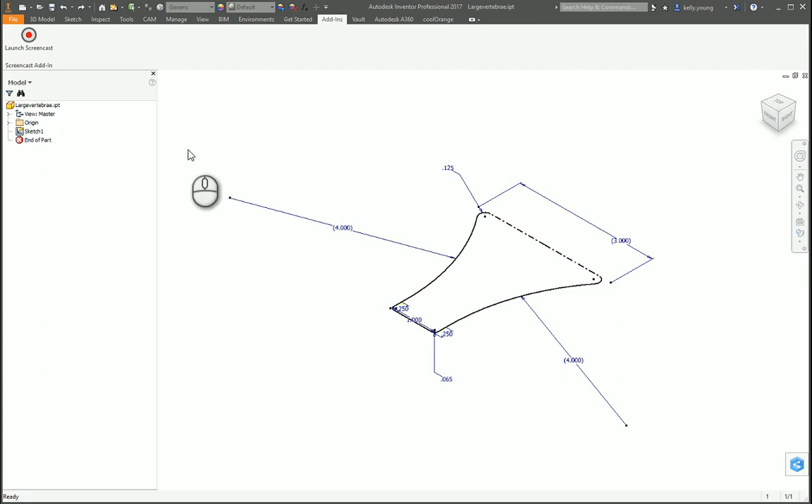Looks like you found it out, but I'll go through this with you a little bit and show you a better way. So you got this part here.

This is the origin, so all the axes come into one spot. If you look at the origin, that's where all the planes converge and all the axes converge into a center point.

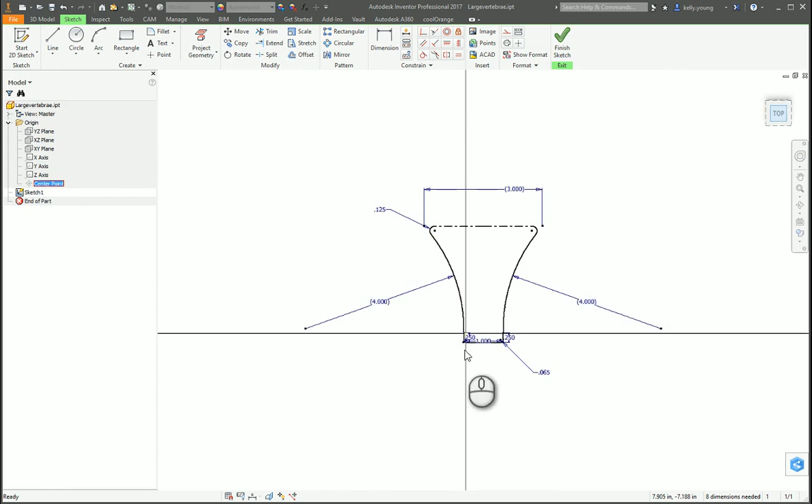So best practice would be to always have the center of your part go through that spot.

Right now, it shows here you have 8 dimensions needed. You could show your degrees of freedom, and it goes all over the place.

So what we're going to do real quick is take this point and put it on the center, and it goes into place. Now there's 6 dimensions needed, so it's still going all over the place. Looks like we still need to control this dimension.

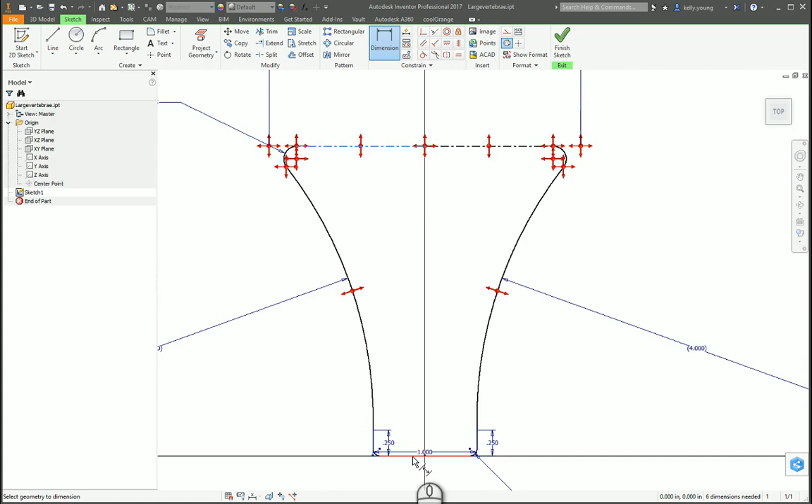Now you put a center line here. A center line is what you actually want the part to revolve around. So think of it like a lathe or pretty much anything that spins. It's got a center axis that spins around it.

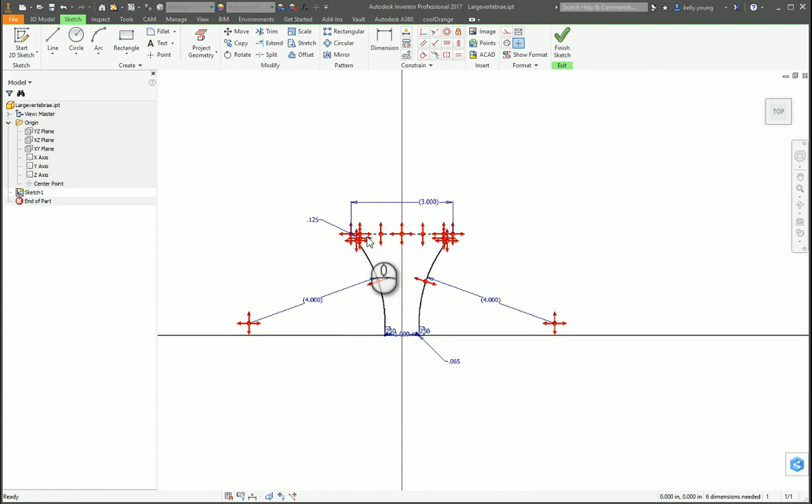So if you want a hole in the middle, you're going to have to revolve around that hole. I don't think that this is your center axis. I don't think you want it to revolve around like this.

I don't think that's what you're looking for, because that's the axis. See how it's dotted?

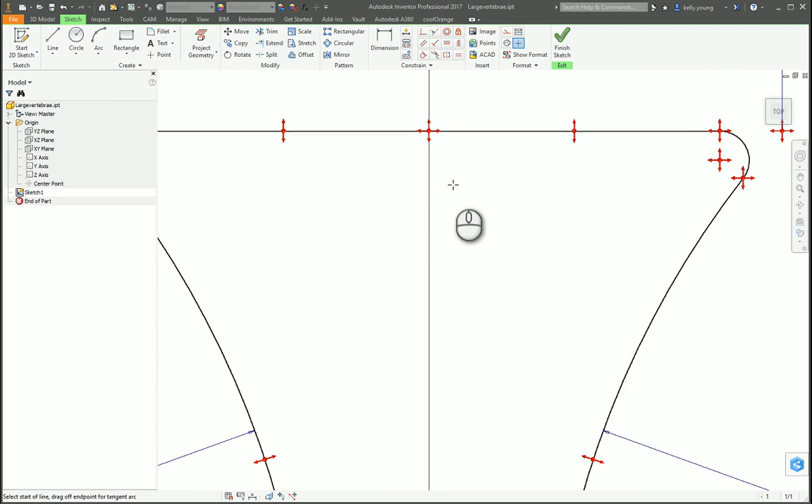It automatically finds that center line. So from the pictures, I think what you want is, instead of making those center, you want to have a line in the middle like this, and then that would be the center line.

So then it would revolve around. Because then you would just say, I want this half around this axis, and that gets you the revolution.

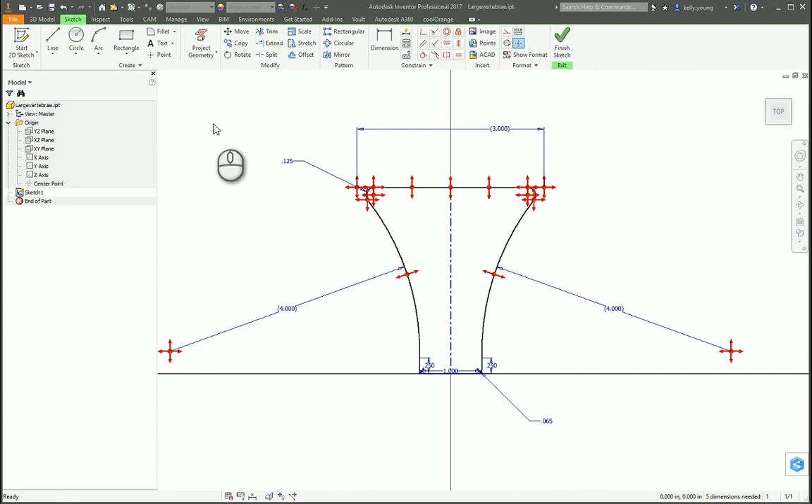Now, furthermore, you're doing double the duty if you know it's going to be a 360-degree revolution. So if we just trim off pretty much everything on this side and get rid of it...

I'll show you why. So pretty much we have half of it, and it's going to revolve all the way around. As long as we have a closed profile going around here, we don't need the other side.

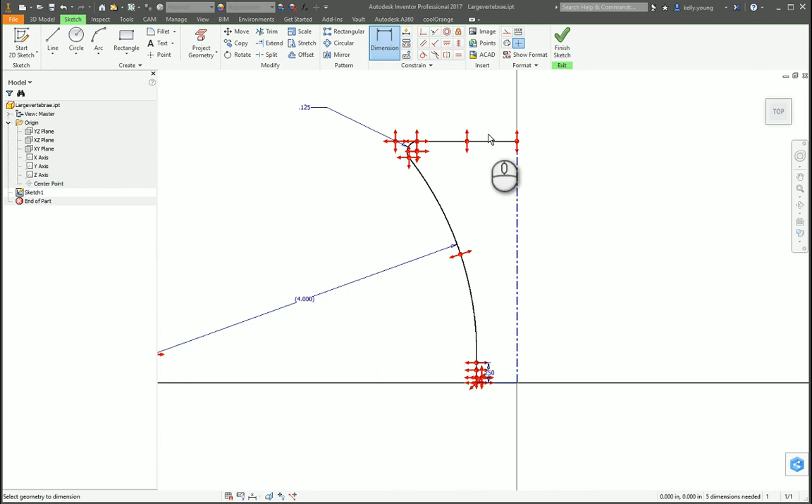So if we dimension here, we're at 3, and looks like we have some degrees of freedom from right here to there. So when we have the center line, it'll pull up a diameter, which gives you that.

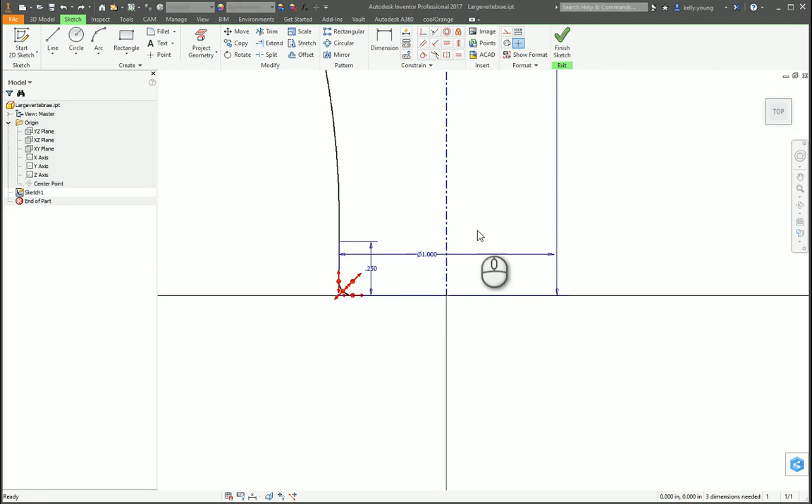If it were not a center line and you dimension from outside to outside, it only gives you a straight linear dimension. Once you have it set to a center line, it will then give you the diameter. So let's go ahead and dimension some of these things again.

It already exists, okay. And if we dimension out to there, that's our overall outside dimension. I don't know if this matters, but...

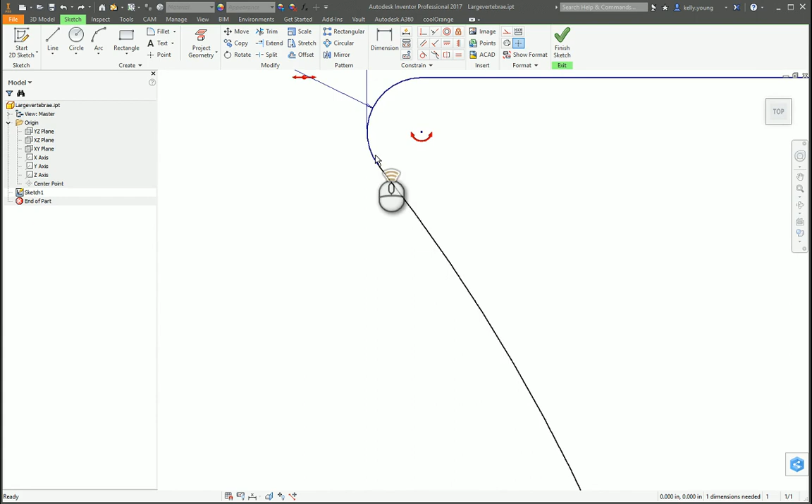So then you can kind of drag it and see what happens. Where's this going? This one.

This one basically puts them in line, so it's completely tangent and smooth. Now we have a fully constrained sketch, so that way we can revolve it around.

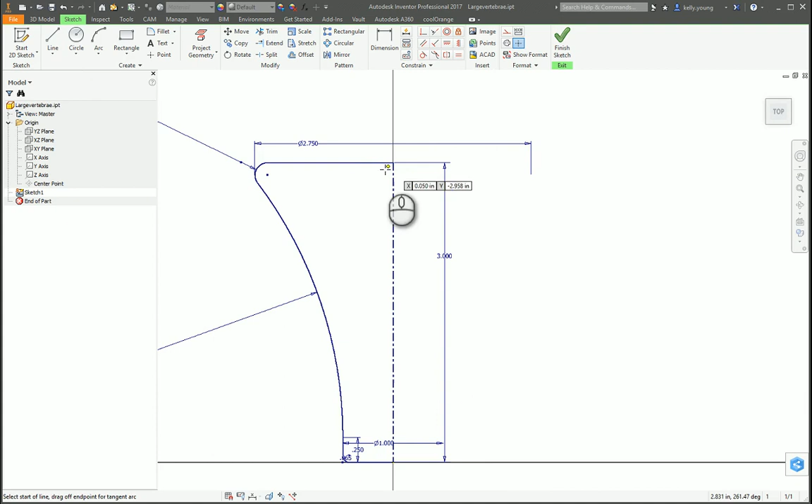Now, you could just revolve it and then put a hole in the center so it goes through it. But if you wanted to, let's just draw a line like so. Then we can trim this.

You'll notice that now it has more degrees of freedom. This can go up and down, and this can go. So now we basically need to redefine those.

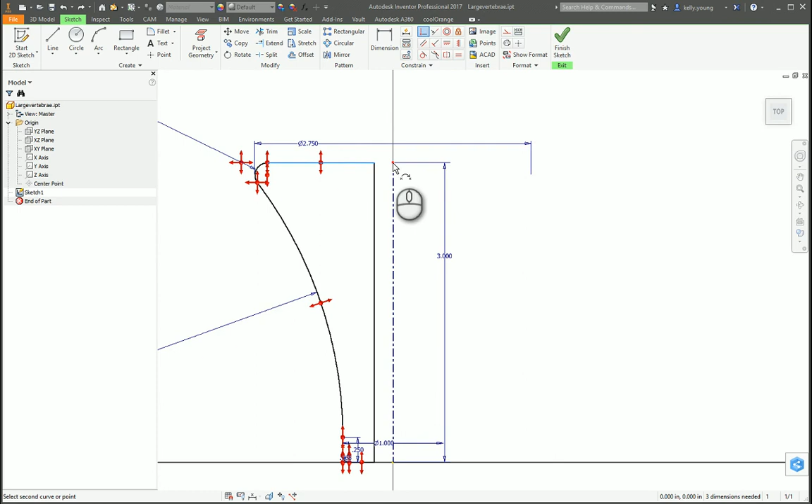So if we use this command, this line will always be on that point. Now the freedom goes away. Same thing down here. This line can go onto that point.

Now it goes away. So now it looks like we have one dimension needed, and we don't know where it is. If we right click, show all degrees of freedom, oh, looks like this line can still move around. That's our center hole.

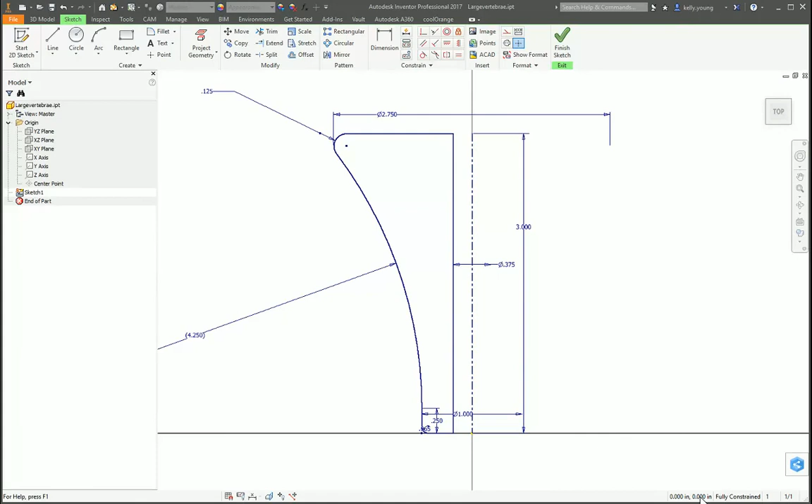So if we dimension it, now you see this diameter comes up. Let's say our center hole wants to be 0.375. Now we have our fully constrained sketch, and we have our center hole. Finish our sketch. So now when we revolve it, it automatically grabs it.

If we were going to do this by manual selection, we would do our revolve. There's only one profile to select, so here it is. It automatically selects it if there's one profile, and if there's only one axis, it automatically selects that.

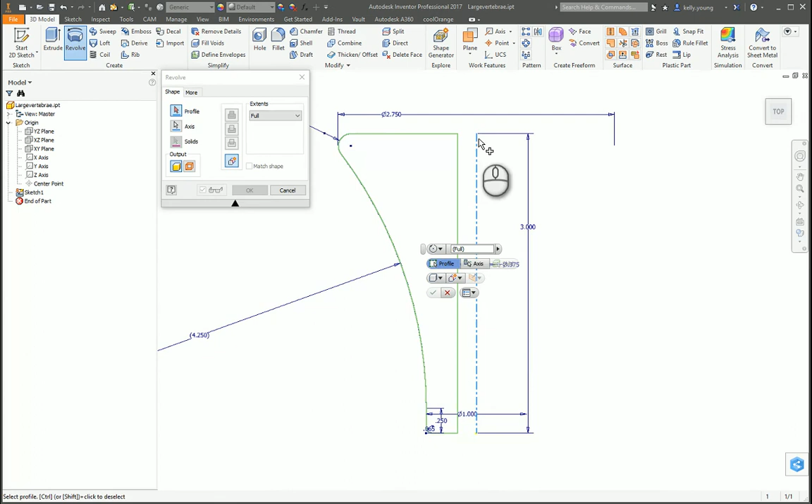So if we select here, and then our axis would be the center line, and we hit OK, then we get our hole in the center, and it goes around.

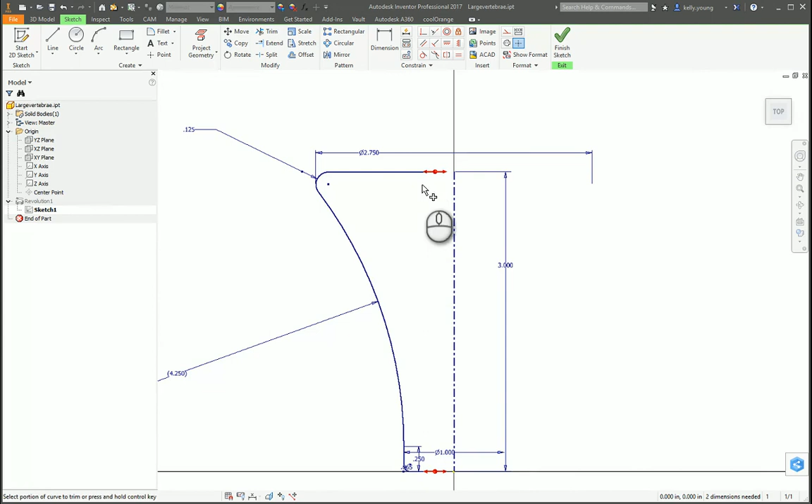So hopefully that gets you going and explains how a revolve works. If you wanted to, like they were saying before, if you extend these to there, finish your sketch, now the hole's gone.

You can create a sketch on the top, create a circle at your .375, finish your sketch, and simply do an extrude as a cut through all. That'll go all the way through, and there you go.

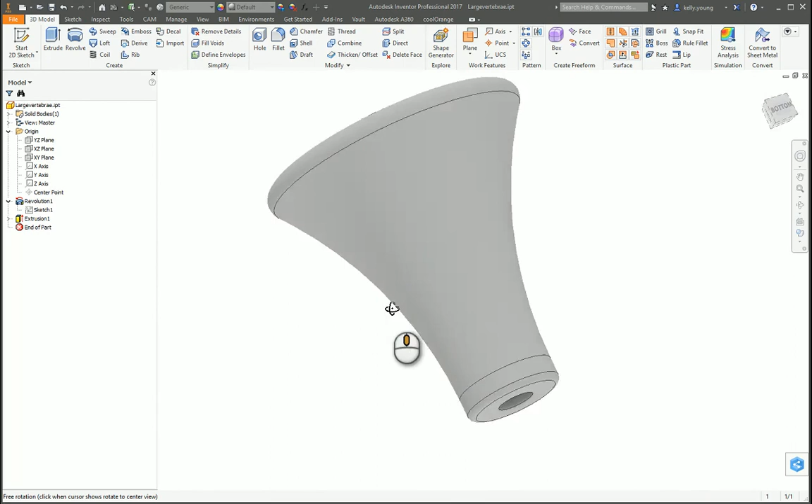So it just depends on kind of how you want to do it, and if you want multiple steps or if the hole's going to change, things like that.

Also, instead of doing that, you could put a point on the top, finish your sketch, then go over here and use the hole command. It'll automatically find the point, so that way you can do different features.

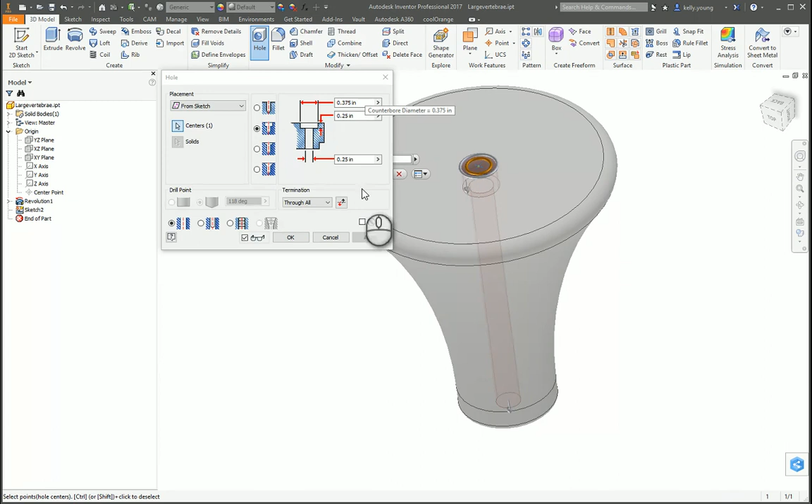You can say, okay, I want that. So if we have this one at 1, you can make a big one. It just kind of depends on what you want to do.

And you can turn on your wireframe if you wanted to see what's kind of going on. There you go. So hopefully that gets you going.